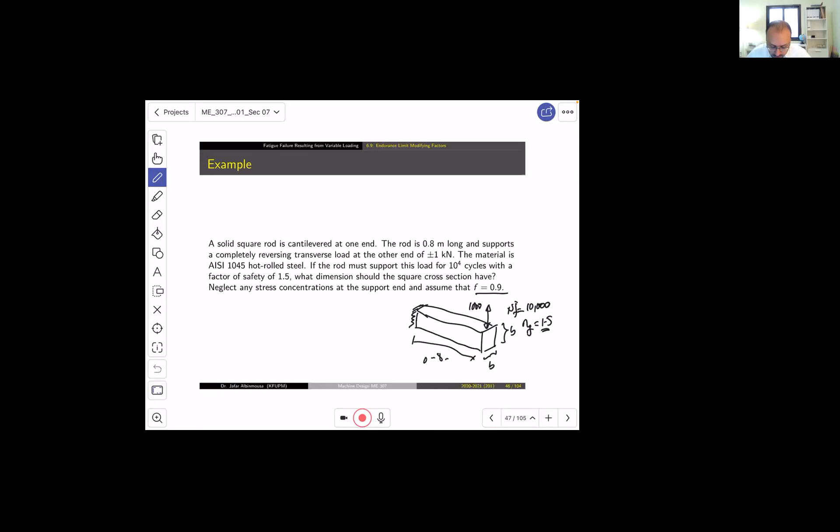So the load here is 1,000 Newton, and the length is 0.8 meter. So what did we do? We said okay, we cannot move with fatigue. There are correlations between the size factor and other things, so we need a size. So what did we do?

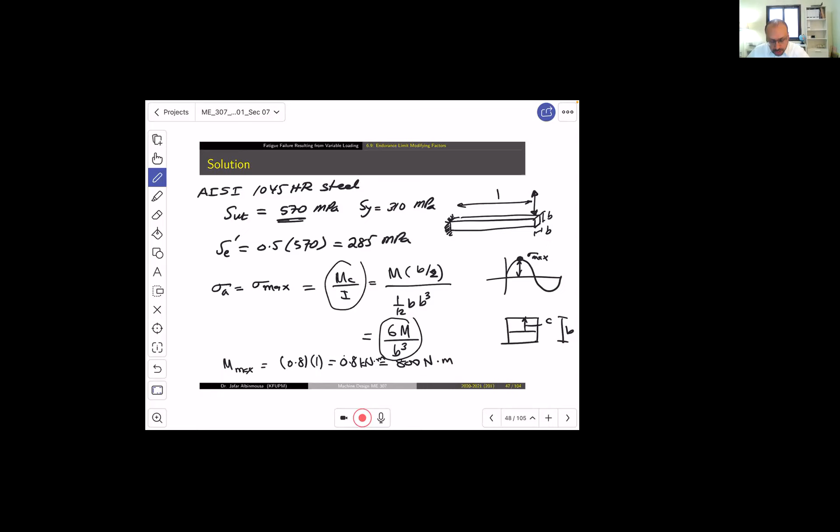We went and estimated a size based on yielding. We said that we will assume that the maximum stress, which turns out to be 6m divided by b cube, is the same as the yield stress divided by the factor of safety. Look at it, this is the yield stress divided by the factor of safety. Is this correct? No, but if you remember...

When we first introduced chapter 5 to you, what did we say? We said that design against yielding is a necessary but not sufficient condition. That's what we said, and this is a good example for it.

Even later in the coming slides, you will see that we will tackle problems. And when we try to check the safety of the component, the first step that we will do is to check whether it is going to fail because of yielding from the first cycle. Why? Because if the load is too high, just by going up the first reversal, you may yield the material, or you may yield it in compression. Who knows if the material has strength in tension different than in compression.

So from that, we estimated that B is equal to 28.5. Why? Because SY is given, N is given, M is calculatable, so you can find B.

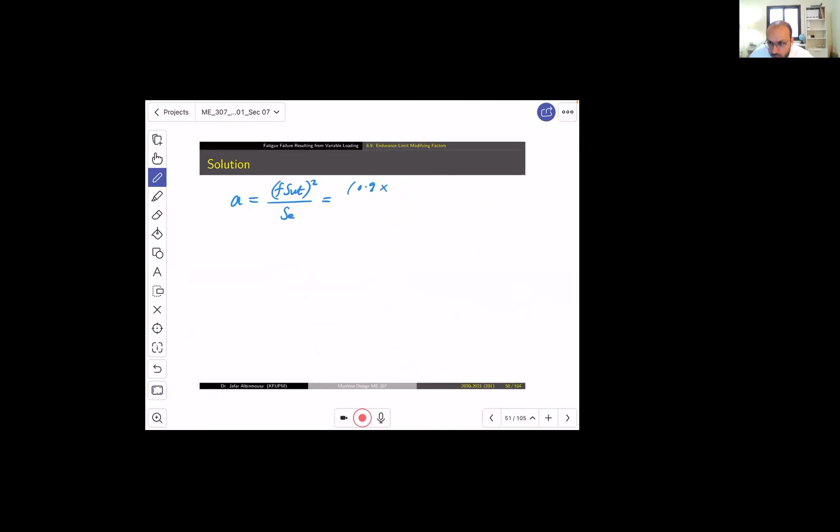So for A, which is equal to f SUT squared divided by SE, we have 0.9 multiplied by SUT. If you remember, it was 570 squared divided by SE, which we just calculated, and it turns out to be 157.5. And this is going to be 1671 megapascal. Sometimes we forget to write the unit for A, but it is actually in megapascal.

B is an exponent, it doesn't have a unit, so it is minus 1/3 log, and then f SUT divided by SE. That's B. So if you substitute the numbers, you will get this as minus 0.1709. Two notes, guys: the first note is that A has a unit of stress, the second note is that B is always negative.

Why? Because if you look at the stress life curve, you have a curve like this, and that's the slope. This slope is negative. So if you make a mistake in the calculation and you get a positive slope, what does that mean? It means that for the material, if you increase the stress, its life increases. That's funny, right? No way, you increase the stress amplitude, you decrease the life. Do you understand? So we just found A and B, okay?

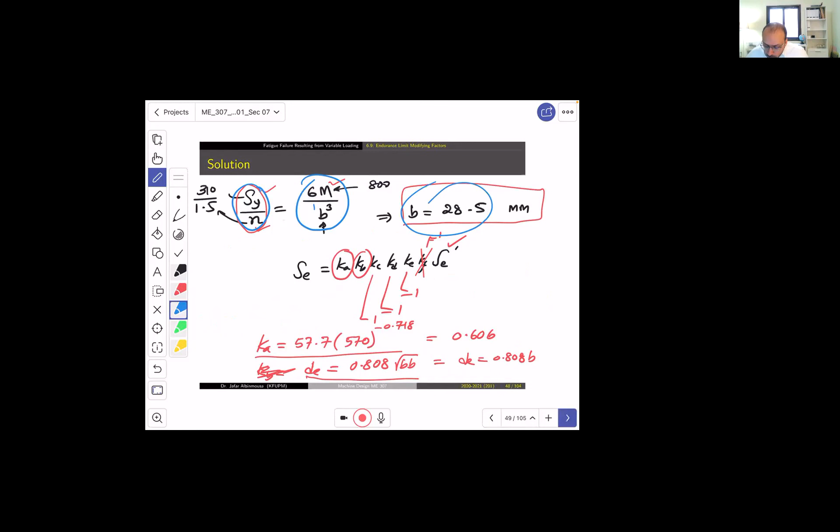So now what happened is this. There is one little issue, ya shabab. I think I did something wrong over here. I solved the problem after checking, and I got the solution after checking. Oh my God, just wait a second, let me see.

Okay, in here we got the endurance limit as 153. So when we calculated, let me show you this. The calculation here is a little bit off. So when I calculate this, it will be 1715.6. If you calculate with me using your calculator, I'm pretty sure you will get the numbers right.

This is 0.1747. It's an exponent which is going to make the life sensitive to it. So usually those exponents, the N to the power B, are reported with 3 significant figures or even 4.

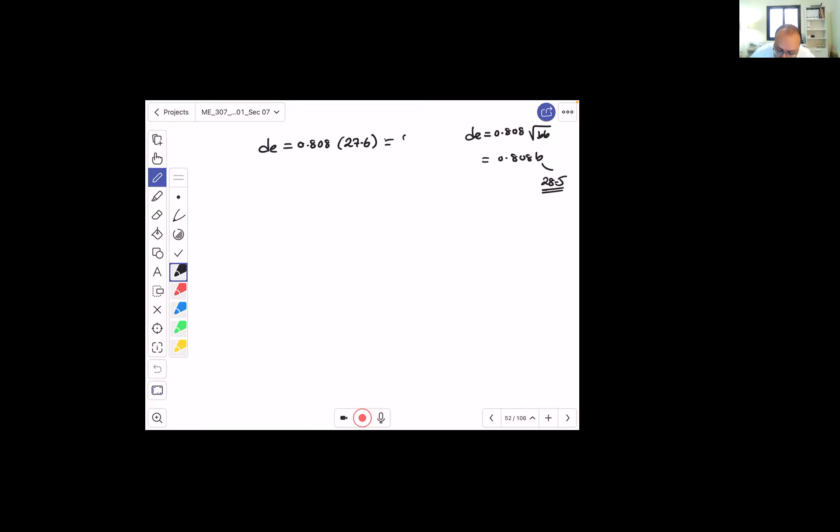If you remember, DE equals 0.808 square root of B B, which is B squared, equals 0.808B. Now B, in the beginning, we put it as 28.5 from yielding estimation. Now I need to adjust it. So what did I get? I get equivalent diameter of 22.3, which means KB will equal 0.912. So a little different.

Now I need to recalculate SE. SE is 0.606, which is KA, multiplied by the new KB, which is 0.912, and then multiplied by the uncorrected endurance limit, and this will give me 157.5. Now look at the difference over here.

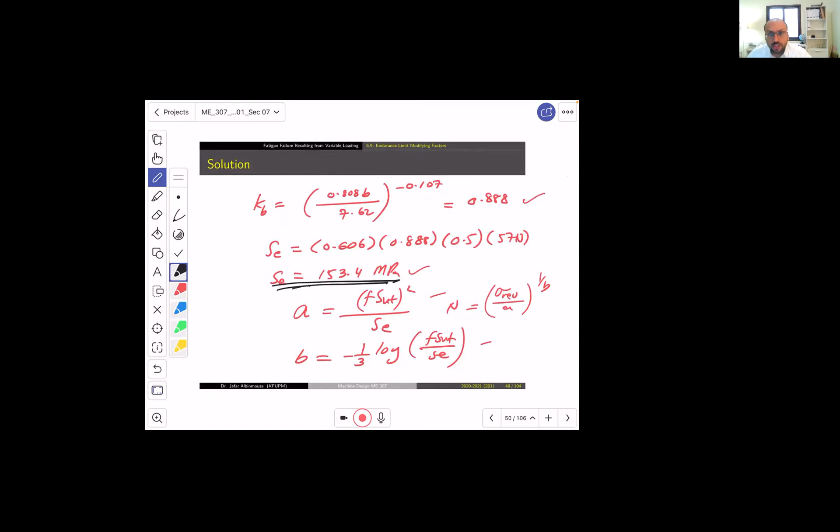Here I had an endurance limit of 153, while here, so this is the problem in the calculation, yeah Hassan. I didn't use the correct endurance limit. We should use the first one that we estimated, which was 153. So if you look at 153 point 4, I think you will get the numbers the same as these.

So this is SE, which is 153. Now, the new one is 157. And now I need to go and calculate A and B based on this new one.

So if I calculate A, which is equal to 0.9 multiplied by SUT divided by 157.5, I will get 1,671, and B, which is equal to minus 0.1709.

This is what you were talking about, yeah Ali? Because it didn't change. The only thing that changed is the 157. The mistake I made is that I solved the problem in the beginning using 157. I should solve it using 153, because in the solution on my desktop, I was putting the wrong slide.

Do you understand me? So now what happened? Do you still have a question, ya Ali? Okay. Now, again, I repeat the problem.

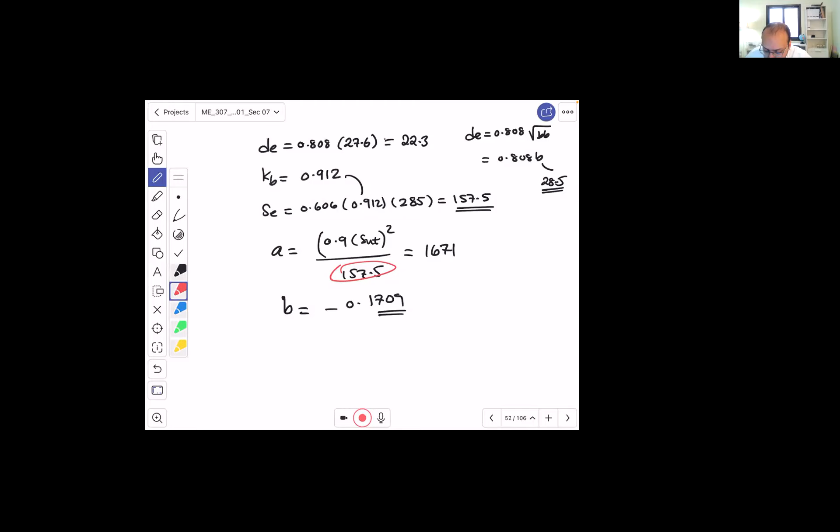I go and find SF, which is AN to the power B, knowing A, knowing B, and knowing N. N is still 10,000. This is what was asked in the question. So what did I get for SF? SF is equal to 346.24 megapascal.

Again, I go and say 6M divided by B cube equals SF divided by N. SF is determined, this is SF, and N is equal to 1.5.

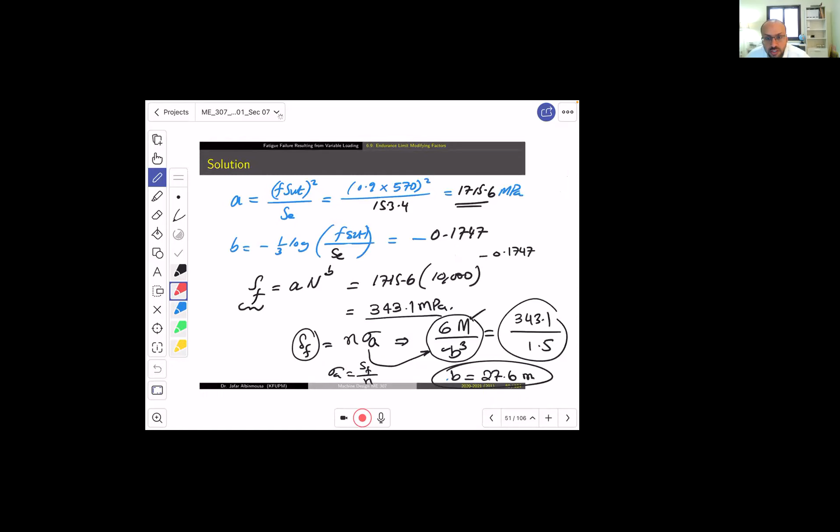M is known, so I am left with B. I go and calculate B, and what did I find? I found that B is equal to 27.5. Now, what was the B that we calculated before? 27.6. You understand? So here I got 27.5, which is very negligible, meaning this is a good value. I don't need to keep repeating the calculation.

Pay attention, this issue will come up for you in the project, because in the project you'll have to make an assumption for the diameter. But is that assumption right? You need to go each time you change the diameter.

Remember how the chain is all linked together. Each time you change the diameter, you need to remember that KB will change, SE will change, A will change, B will change. Do you understand? So you have to be very careful. Each time you change it, you have to change everything again and check it out. I hope you understand what I am doing.

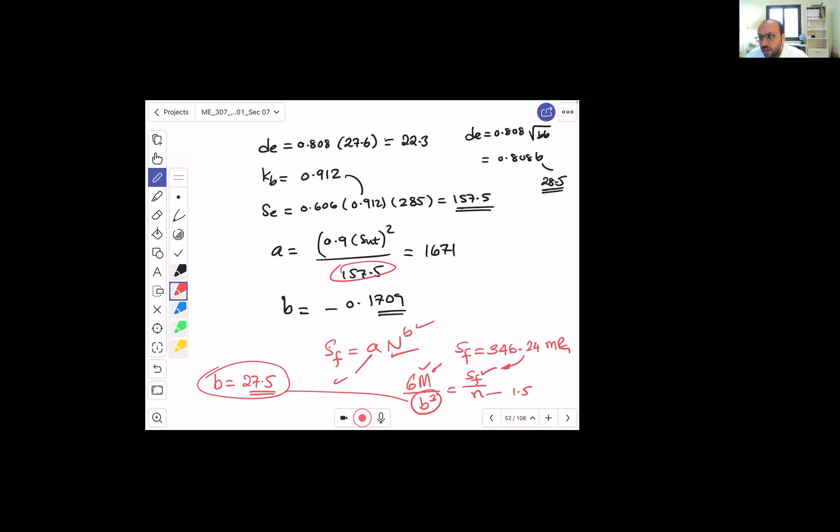Okay, now look what happened. I rewrite the same problem. Okay, the same problem, but this time I am telling you that this square rod has a length of 0.8 meter. It's the same material, completely reversed. The load is plus 1 minus 1 kilonewton, and the factor of safety is 1.5. And I said, what is the number of cycles the rod can sustain if B equals 27.5?

You understand? So I am reversing the problem. I'm showing you how I can make the problem about geometry estimation and how I can make the problem about fatigue life estimation. Look, the difference is very clear. In geometry, it's probably an iterative solution, you have to do multiple iterations, and I showed you why. We made an estimate for the diameter or the B based on yielding. We found the strength, and then when we found the strength, we realized that from that strength, if you calculate B, you get a smaller B or a different B.

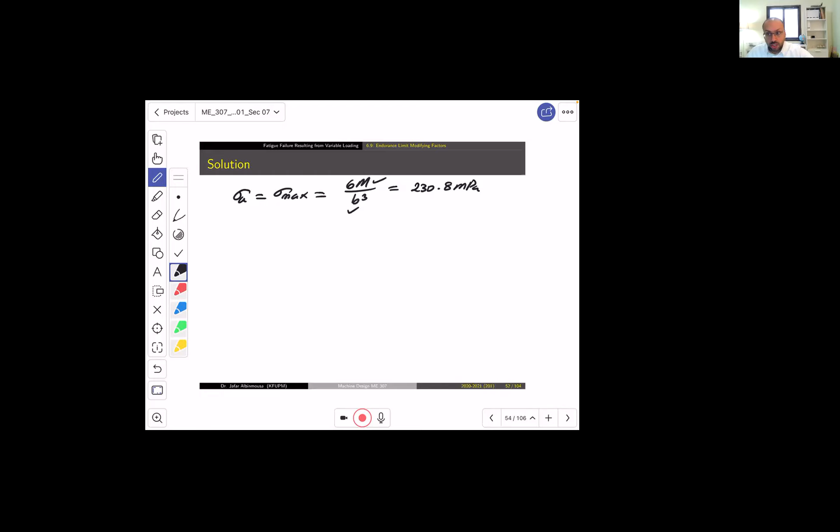Sigma A, which equals sigma max, is equal to 6M over b cubed. We discussed the equation, right? I don't need to explain it again and waste the time. So this is going to be 230.8 megapascal. Why? I know B, I know M. The detailed solutions are in the slide, shabab, so I don't need to repeat every single detail.

Ka equals 57.7 multiplied by 570 to the power minus 0.718, which is going to be 0.606, just the same as before. DE will be 0.808 multiplied by B, which is 22.22. KB will be equal to 0.912. What is SE? SE is going to be 0.606 multiplied by 0.912 multiplied by 285, which is 157.5. Not strange, right? Similar to the number we were getting.

A is 1671, B is minus 0.1709. So what do we do? We say sigma reverse equals n sigma max. So I need to multiply 1.5 by 230.8, and then I calculate n. This value is 346.21 divided by 1671, to the power 1 over minus 0.1709, which is 10,004 cycles - nearly 10,000 cycles.

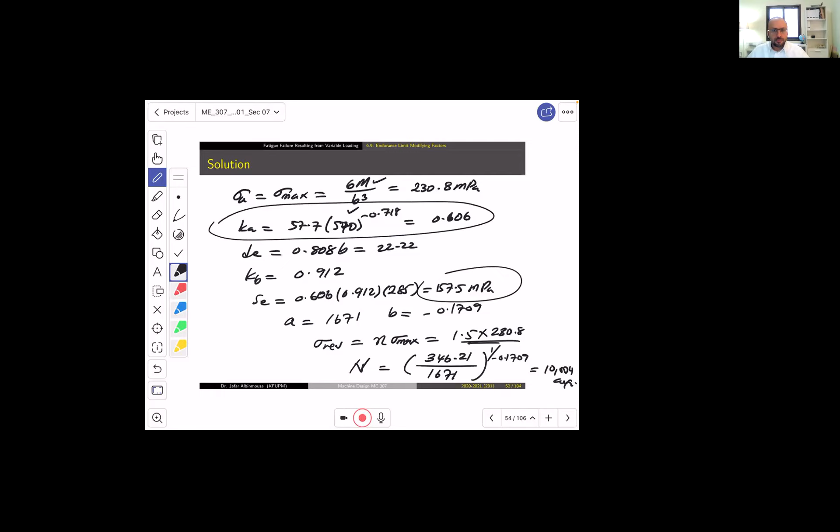So for this reason, shabab, my advice to you is as much as you can, try to automate a little bit of these solutions. For example, the endurance limit - you better go to an Excel sheet and write the factors. Then whenever you change one, everything changes with it, because this recalculation will happen to you no matter what.

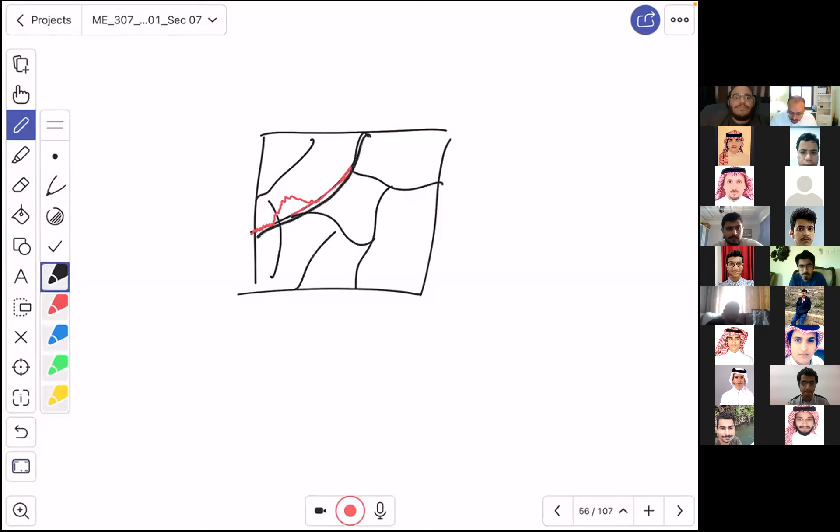Some materials, we know this. If you remember in Materials Science, they taught you that we can do grain or material strengthening mechanisms by which we diffuse carbon into the grains, or we can refine grains.

If you have a material with very fine grains, it will behave differently than material with large grains, especially when you introduce a crack inside it. When you have too many grains, a crack will have to find a way between these grains. It's like saying this place is crowded and this place is less crowded. If you think of yourself as a crack trying to move on, it will be different depending on whether there are too many people to push through or not.

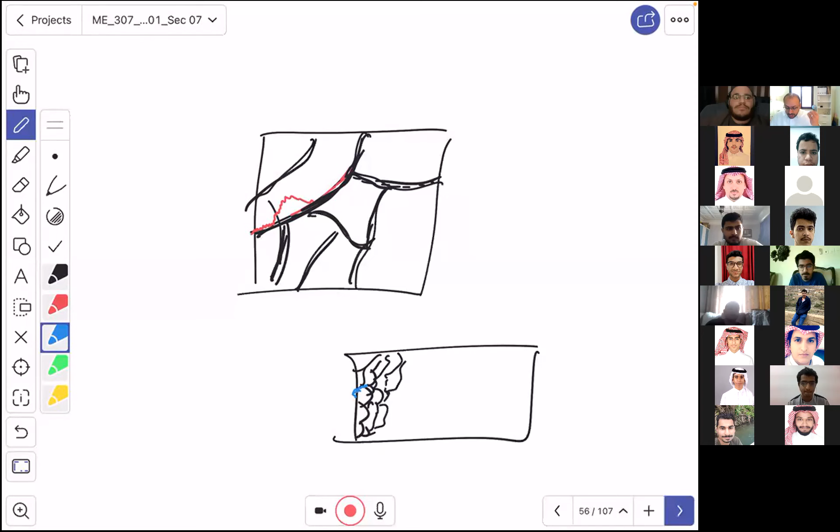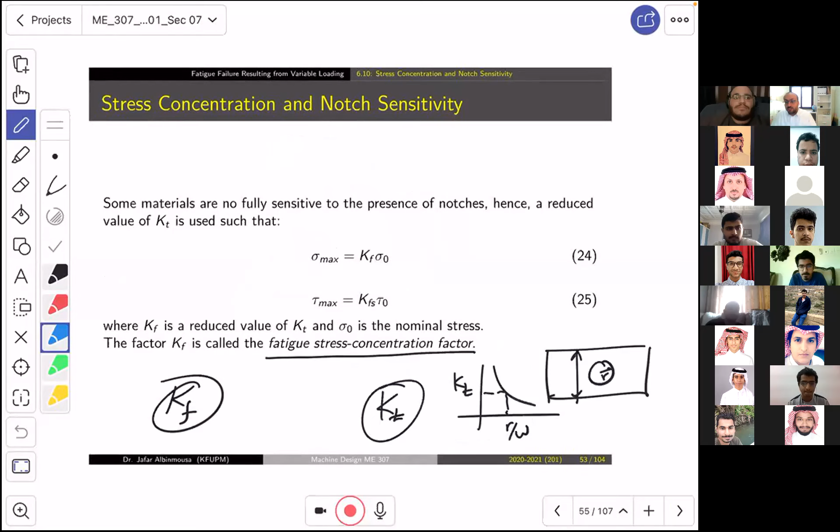So it makes a lot of sense that the stress concentration factor in fatigue will depend on the material. You tell me this is a fine grain material, you tell me this is a large grain material. Some materials have more ductility, some have more hardness, and this just makes a lot of sense.

Well, this doesn't work with fatigue. What we are going to do is multiply the nominal stress by KF for normal stress, and for shear stress we are going to call it KFS.

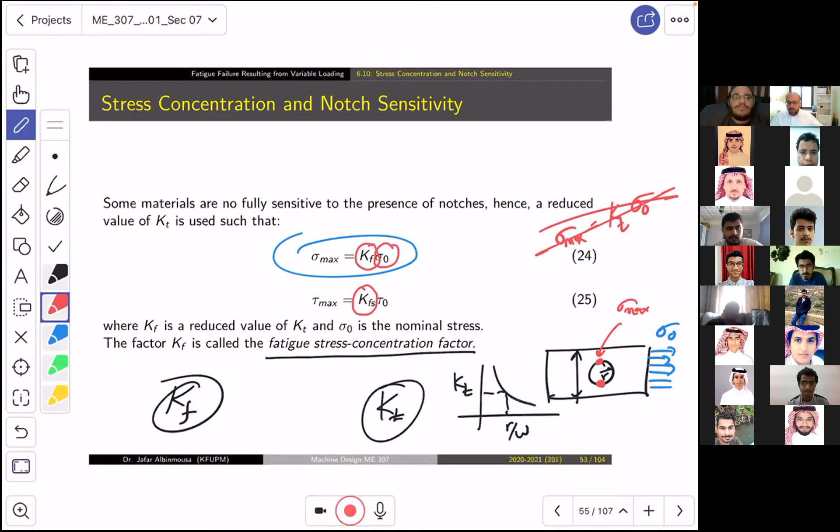Now the question is, what is KF and KFS? One of them is the normal fatigue stress concentration factor. The other one is the shear fatigue stress concentration factor.

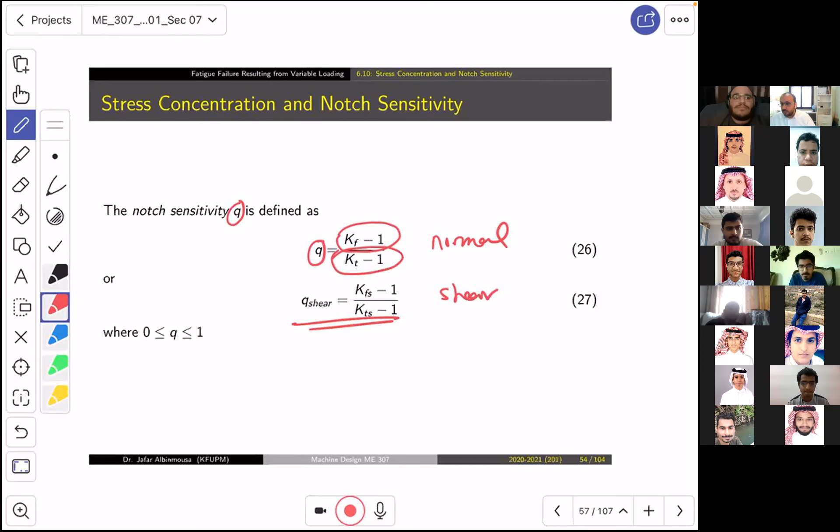Notch, guys, is a mother word. It can mean crack, it can mean hole, V notch, U notch. You bring two materials, you introduce to them exactly the same notch. One of them is sensitive, it fails so fast, and the other one is not. That's the meaning of notch sensitivity.

So if we multiply this by this and this by this, what will happen? I will get Kf, which equals 1 plus Q multiplied by Kt minus 1.

Notice, Kt is very simple, found in the back of the book. It's exactly the same as the one you calculated from civil engineering. The only question is, what is Q? That's the new part. And then you will be able to calculate Kf.

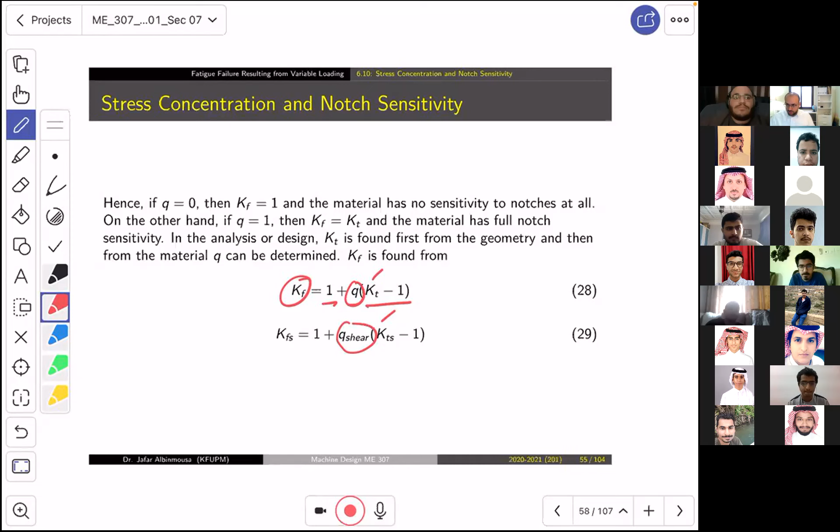If I came and told you there is a material, a specimen with a notch like this, this is its radius. If the notch has a hole, its radius is half of the diameter. If the notch has a groove like this, this is the notch radius.

Do you understand? The depth, call it the depth. That's the radius of it. And if you know it, all what you need to do is to tell me, is this steel or aluminum?

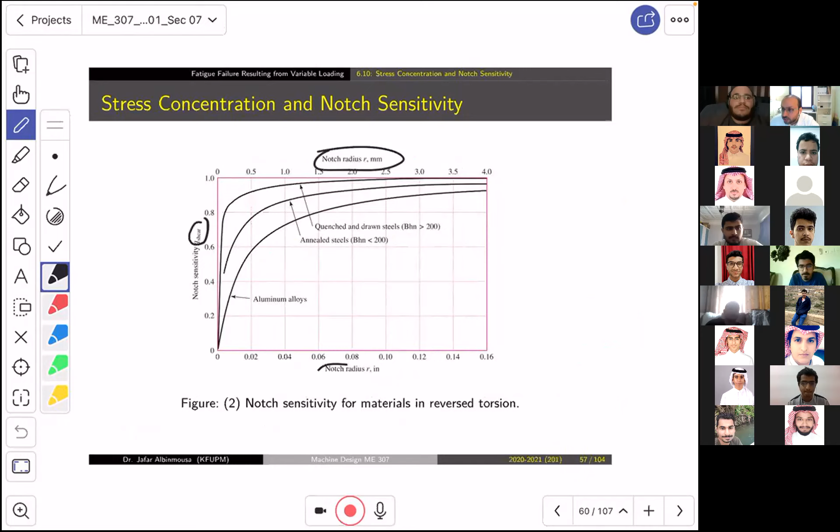Of course the question you might ask is, what if I am beyond this curve? Okay, if you are beyond this curve, use these values.

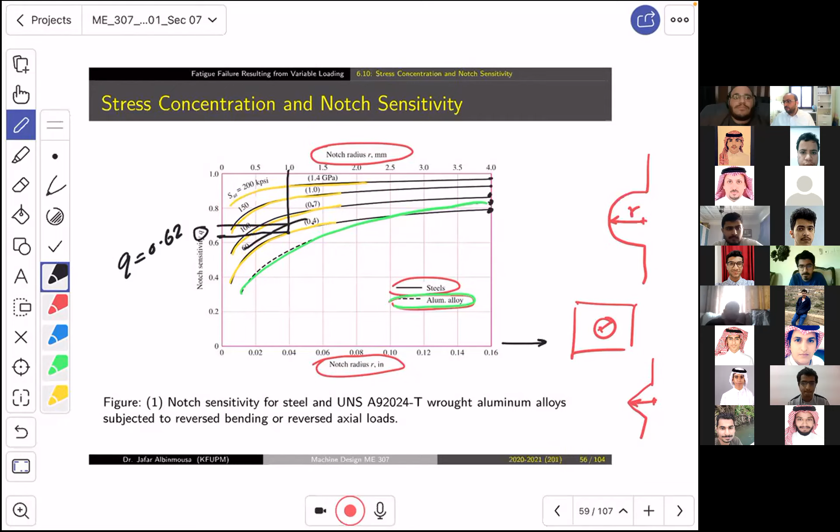What if you have 500? Okay, interpolate between 0.7 and 0.4. This is 500, so this is the Q. Find a way, this is what is available and try to find a way using it.

There is an equation which is called the Neuber equation. It says Kf equals 1 plus Kt minus 1 divided by 1 plus square root of A over R. What is A and what is R?

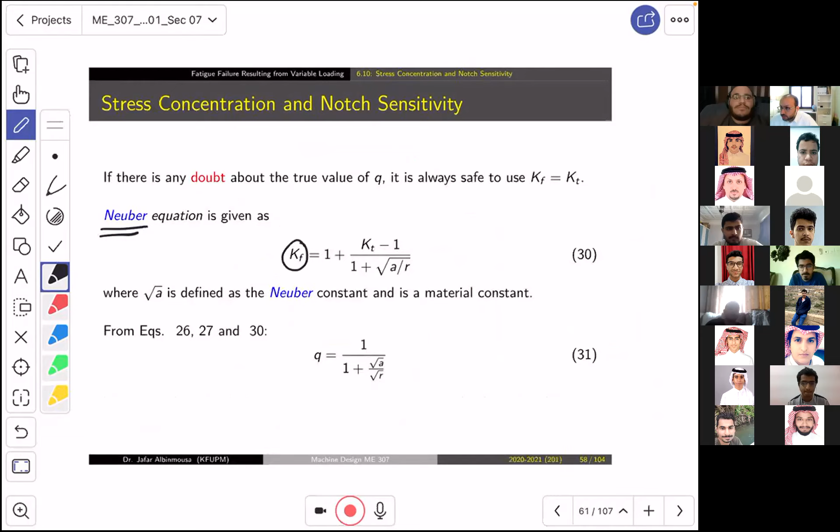A is defined as the Neuber constant, and it is related to Q like this. And if you want to find what A is for axial and bending, this is the equation as a function of SUT, and for torsion, this is the function of SUT.

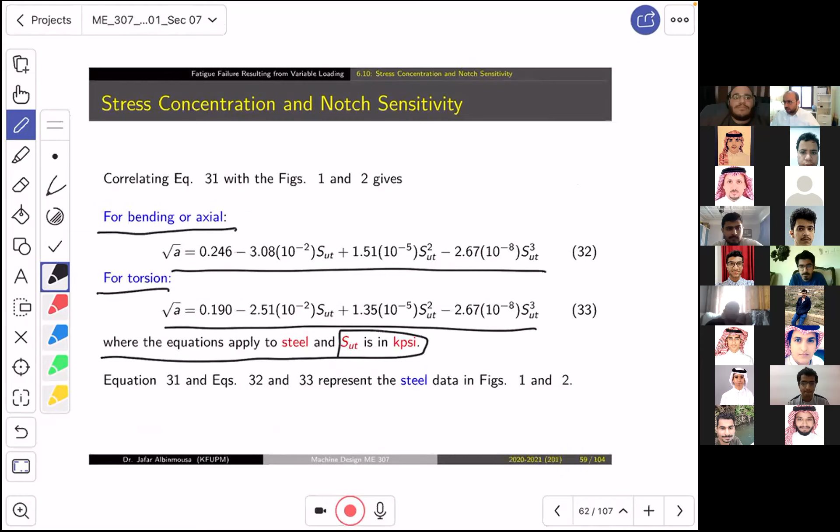However, these equations only apply for SUT in kpsi, if you want to know the number exactly. Okay, guys, so this is it.

One last thing before the time finishes. Cast iron, guys, notch sensitivity for cast iron is very low, varying from 0 to 0.2. So in general, if you get a cast iron material, it is recommended that you use a Q of 0.2.

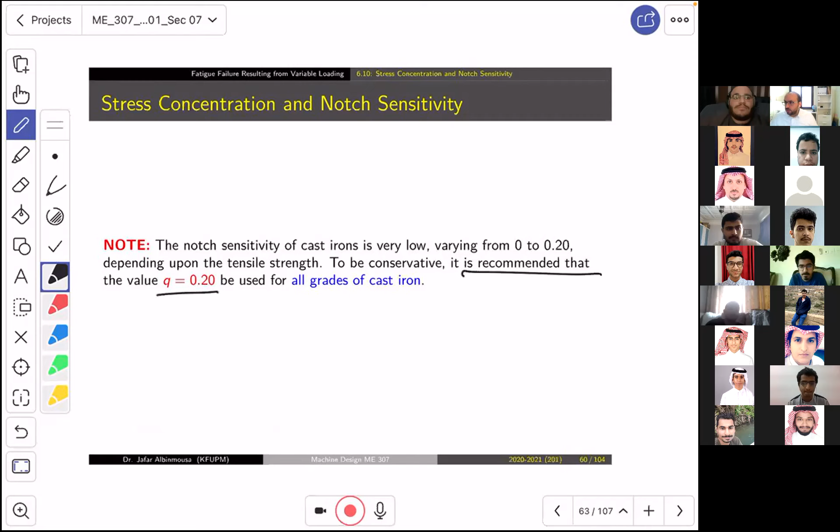You understand? So in the next class, inshallah guys, we will talk about fluctuating stresses, and what that means is when we introduce mean stress. So how do we deal with the mean stress? Because reality is not always sinusoidal and completely reversed.